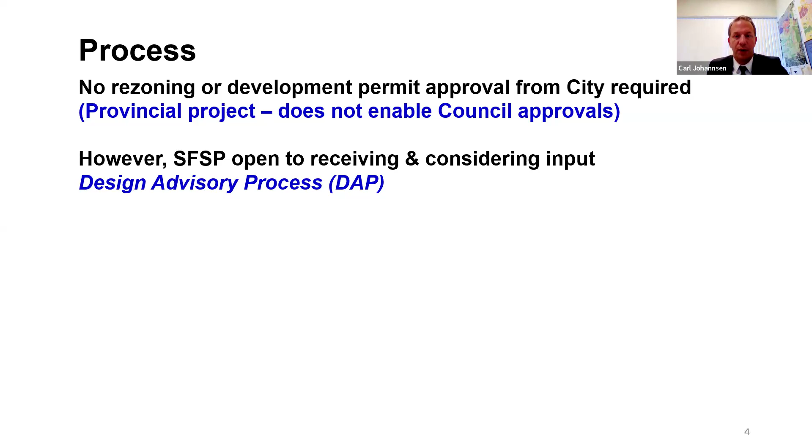So there's 3 rounds to the DAP process. In the first round they bring in their design, then they do a round of public engagement, open houses, which happened earlier this year.

And then it goes to municipal review where there's staff review and review by ADP. Once all those comments are collected by the design builder, it goes into a second round of updates, where they update the design where they see fit, and of course keeping cost control and the basic design of the project in mind.

Then they go through another round of public engagement, back to municipal review with an option to go to ADP, and then coming up with a final design that will move forward to construction, which would happen later next year. So at this point, we're at municipal review in round 1.

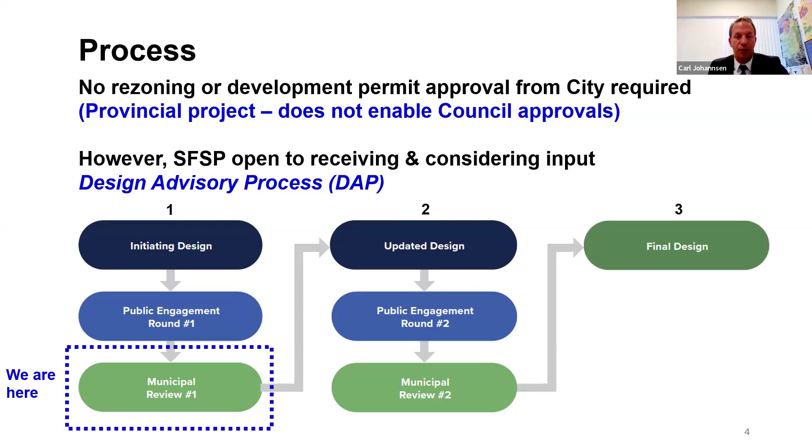So getting to the site is really important to get a good sense of where the SkyTrain station, the Langley City Centre station, is landing. With the context there, we know there's a lane and buildings to the south, but these are the back of house of these buildings, and the site is somewhat concealed behind buildings from the high exposure, high visibility intersection of Fraser Highway and 203 Street.

So when we talk about the transit user experience, knowing that transit users are pedestrians before they get on the train or bus and after they get off, the existing conditions on the site may inhibit or affect this experience. So it's important to have concerted planning and design to enhance this user experience, to make sure it's welcoming, inviting, and safe for transit users now and into the future. And what I mean by now is opening day in the latter half of 2029.

This site in the city, the sign on it might say the end of the SkyTrain extension, but we've always considered this as the gateway into the SkyTrain system. It's an opportunity for a landmark transit-oriented development to occur around the station, especially just south of it, where the station can be integrated into the Fraser Highway frontage and 203 Street intersection.

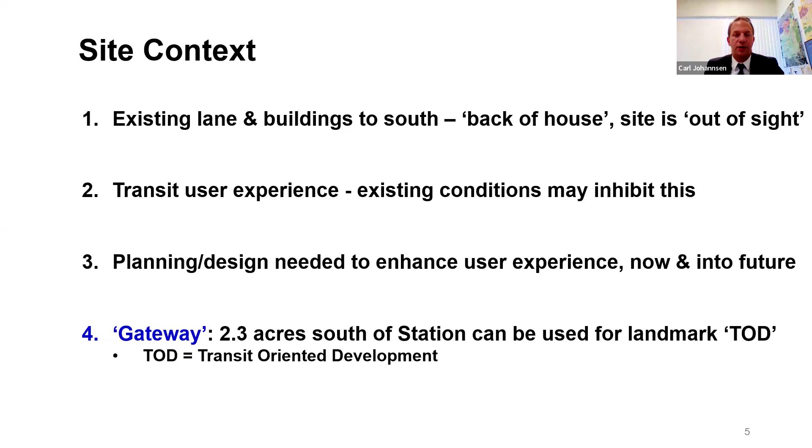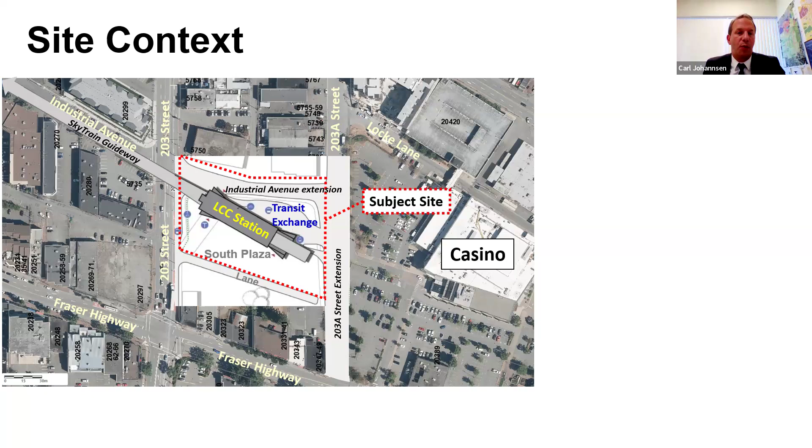So here's the site on the map, outlined in red, with the streets and the casino to the east for context. And here is the station landing on the site, also showing the extension of Industrial Avenue eastward to 203A Street, and the extension of 203A Street down to Fraser Highway to ensure there's a good grid system, which is also important for the operations of the transit exchange that will be located north of the station.

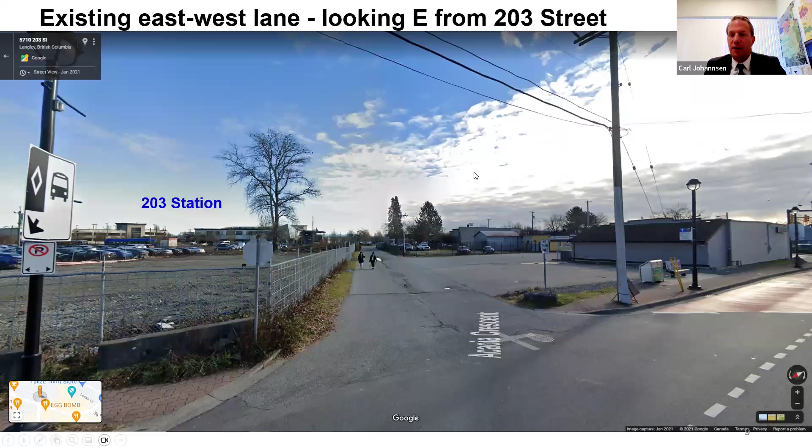The point of showing this is we know that SkyTrain is an elevated system, with elevated platforms, and all the transit users come out at the bottom of the station. You can see on the right-hand side all the glazing for the entrance. But stations typically also have a back of house, with offices and other elements hidden behind blank walls.

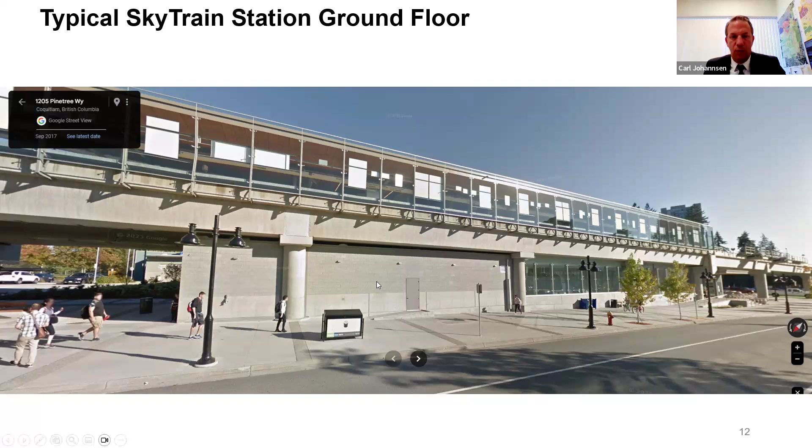So it's a bit of a design challenge, but also an opportunity when we think about the site here in Langley. It's something we really wanted to take advantage of when planning the site, knowing the SkyTrain station was going to land here in our downtown in that fashion, as I showed you on the previous map.

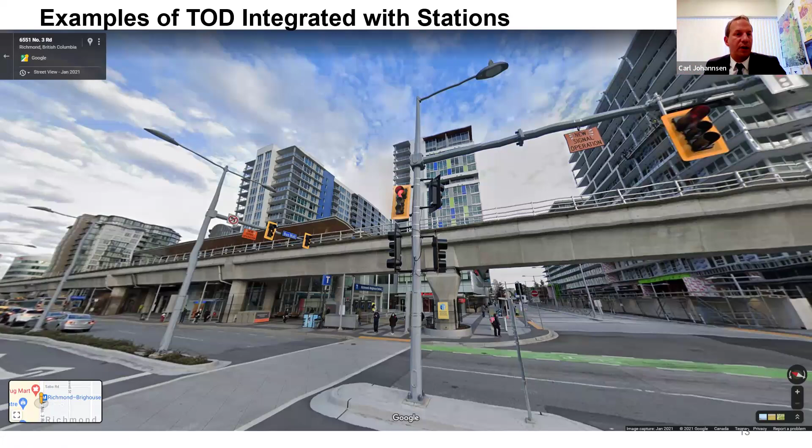So other cities have done a really good job integrating transit-oriented development right into the stations. This is in Richmond, and this is in Vancouver, where Cambie and Marine Drive meet up, showing the integration of new development directly with the station here.

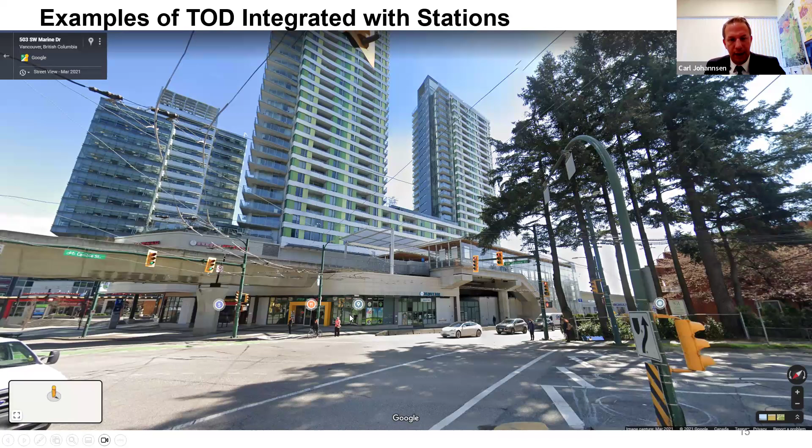Using the elevated station to the advantage of the development, but also tucking in retail and active pedestrian spaces underneath the guideway and beside it. That really helps to create a more active transit user experience, something like what you'd find on a downtown Main Street with a lot of shops, where people can walk by and you're not walking past a series of blank walls.

Mayor, did you want me to stop for questions now or wait till I finish my slide deck? You might as well go through it and then we can ask questions at the end. Okay, it should be just another 5 minutes here.

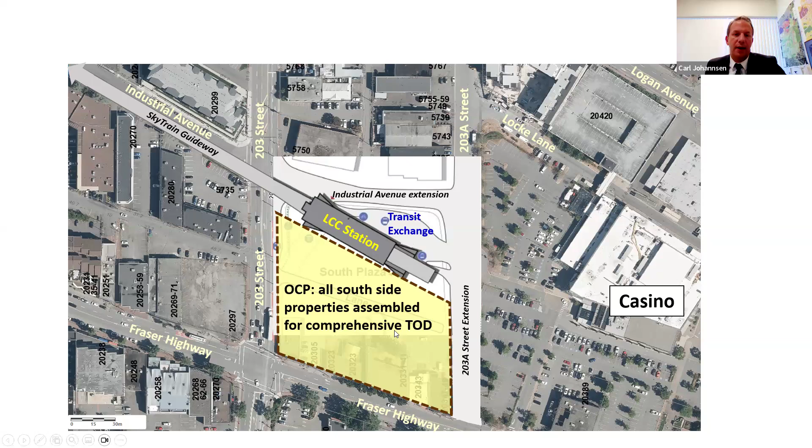In the OCP, knowing that the south part of the station structure would be a combination of entrances and blank walls, and knowing we want to connect the station to our high profile intersection at Fraser and 203, the official community plan calls for comprehensive redevelopment of the south side. The South Plaza identified in the ADP report and drawings is intended to be a temporary condition, but it's important to make sure it's well designed because it's probably going to be 5 to 10 years before that area is assembled and redeveloped consistent with the OCP.

Showing this from the report, this is one concept illustrating what's in the OCP in terms of bringing future buildings up to the side of the station, and also creating pedestrian plazas and connections from that high profile intersection through to the station entrance to create that direct connection. All of these pedestrian areas would be lined with retail, cafes and shops, with housing and offices above.

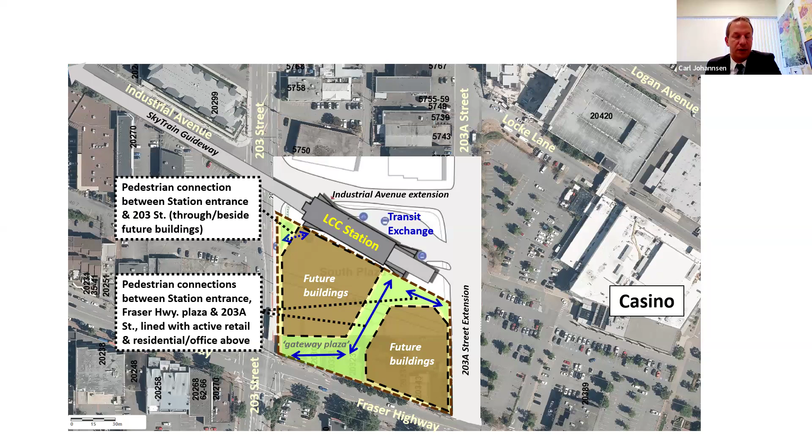That really helps to put eyes on the street and create a vibrant, active urban area that provides opportunities for transit users to get things when they're going to SkyTrain or coming off, and also helps connect the station into the urban environment and a growing downtown.

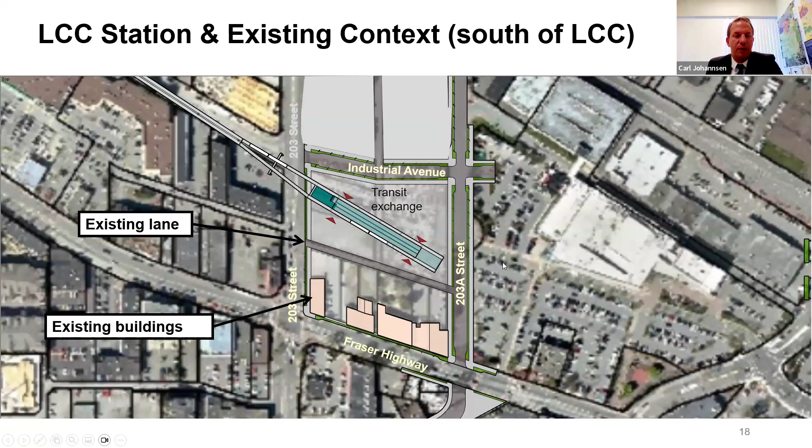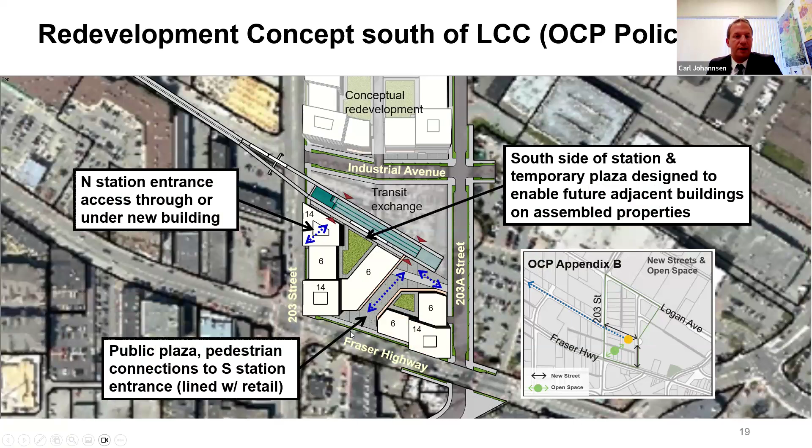As part of the process working with TIC, we did some three-dimensional modeling where we brought in the station, showing the existing buildings, and then showing how development could be directly adjacent to the station, where the entrance can actually go through part of the building. This is conceptual, it could be done a few different ways, but the key idea is creating that clear line of sight and pedestrian friendly connection between Fraser Highway and the main station entrance.

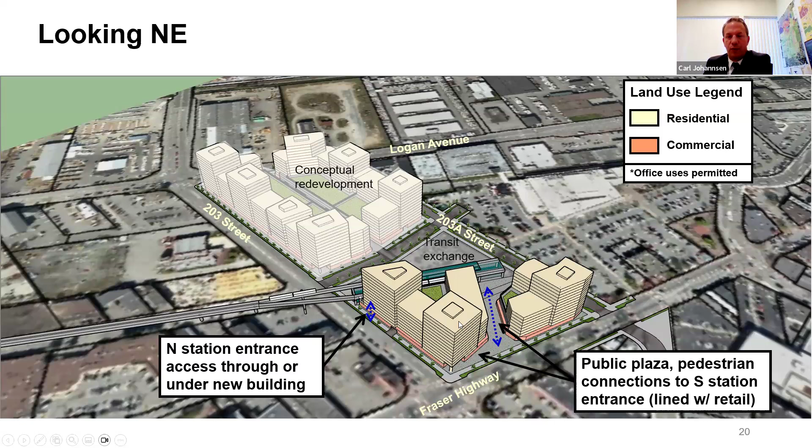Here's a perspective view of that, again showing the plaza with retail, offices and active uses on the ground floor, and housing and offices above.

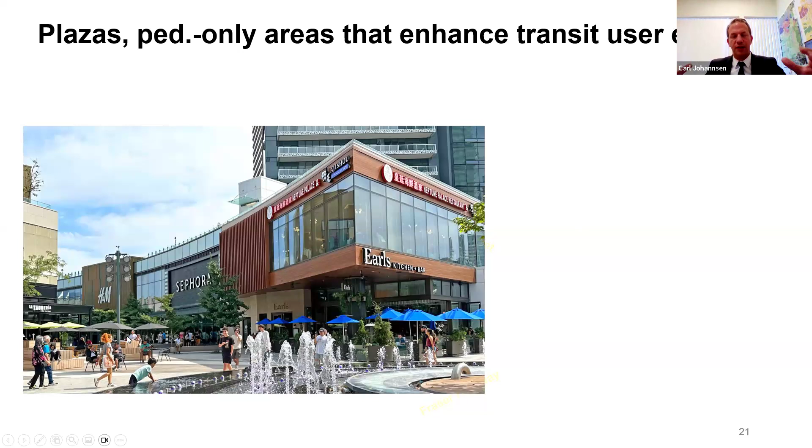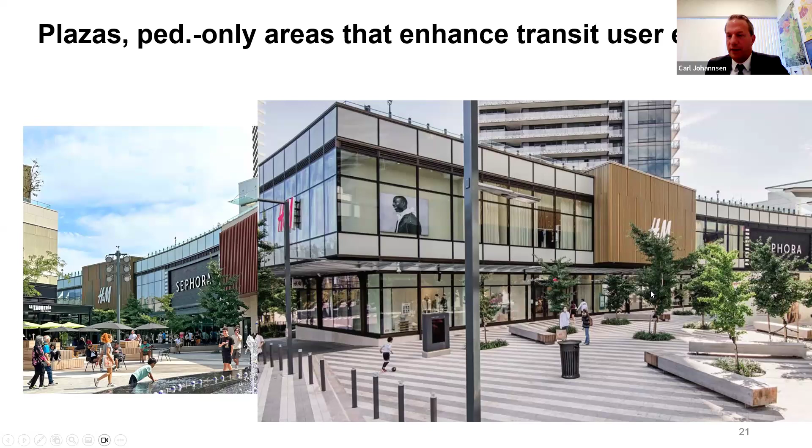To give you an idea of what this could look like using real world examples from Burnaby and Vancouver, the point is to show how the ground plane in the plazas could be treated with trees, paving, outdoor seating and patios, making sure there's development directly adjacent to where we have a high volume of transit users going to and fro. This example shows clear glazing along ground floors to provide visibility and engagement with buildings, lots of trees, and signature paving treatment.

These previous examples are from Brentwood Mall. This is Marine Gateway, showing a really enhanced plaza area with ground floor retail and housing above. You can imagine that in our case, the station entrance could be at the end here.

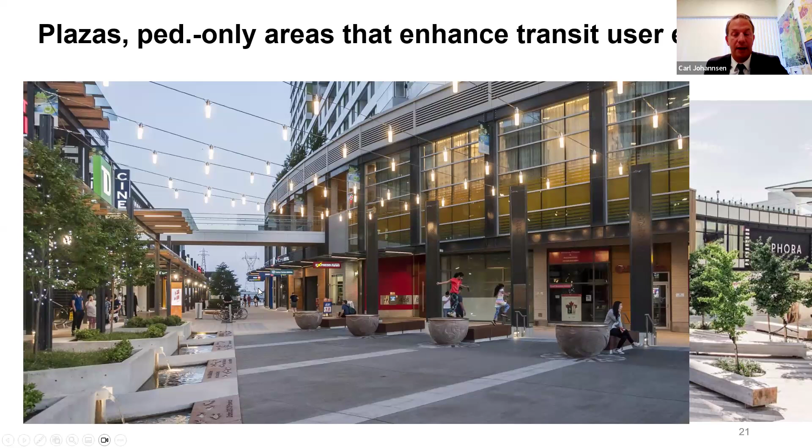Here's another view of that, again showing the scale. It can be scaled to something conducive to what we have here in the city with our height limit up to 14 stories.

With that, we provided all that input to TIC, and when they brought in their contractor, South Fraser, the design build contractor, they took that into consideration, but also brought their own design based on the reference concept design created over the past few years.

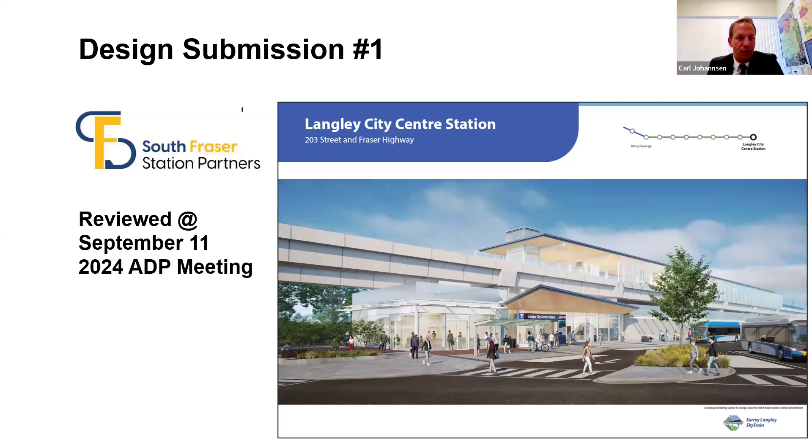This was presented at the ADP meeting, and you can see this is a view looking at the transit exchange side of the station. The architect really wanted to emphasize an open platform with a lot of West Coast theming with wood materials, a lot of glazing here with a retail unit and the entrance here, and then the transit waiting area.

Further to the north, using screening and plaza areas to really enhance the transit user experience and make sure there's a lot of eyes on the plazas and the transit exchange.

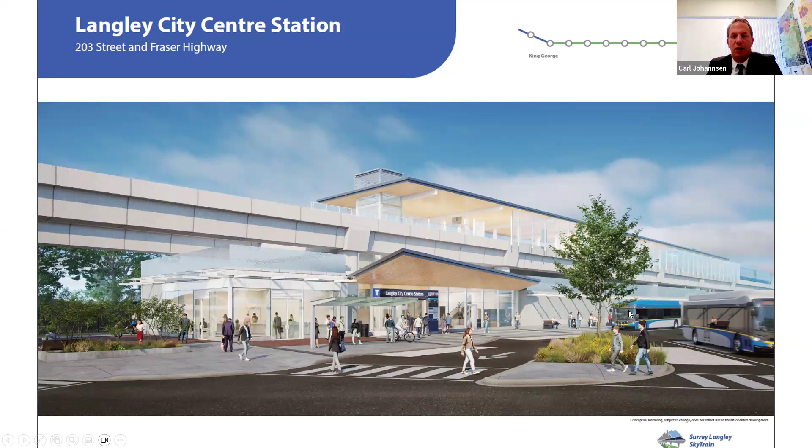This is a view of the exchange, and the exchange also includes the bus parking or pickup and drop off areas, which are up against the station here where my cursor is.

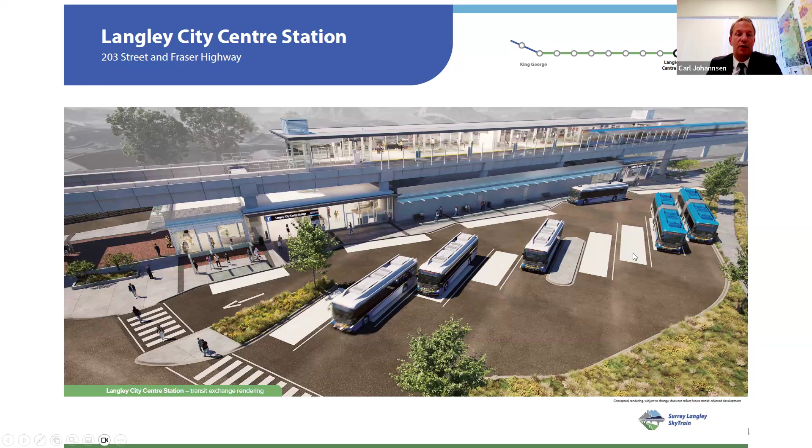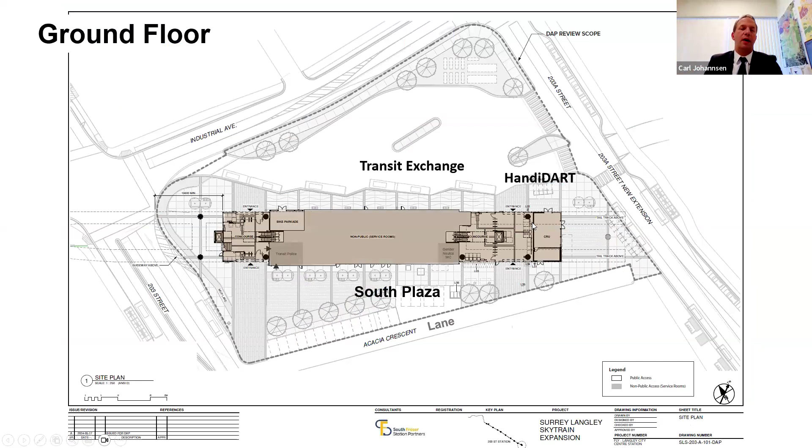This area here is a bus layover area, which is being designed to facilitate future electric bus charging. This shows the ground floor plan. I want to show some of the highlights being brought forward as part of the design. This shaded area is the actual footprint of the station at the ground floor as it sits on the site.

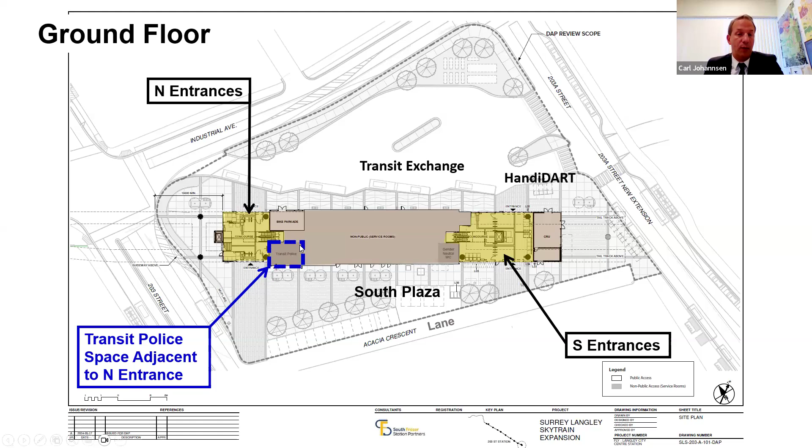Here are the entrances on the north side and the south. I say entrances because you can actually walk right through from the south to the north and from the north to the south. Here is the transit police space, which will be directly adjacent to the north entrance. That's a pretty key aspect of this design, and something the city has requested from day one, to have a transit police presence at the station.

The bike parkade is located adjacent to the transit exchange for ease of use. There's going to be a gender neutral washroom put in the station behind the fare gates. And like I said before, there's a retail unit that's going to be featured at the end to provide some services on site and some immediate transit user convenience and vibrancy on the site prior to development happening on the South Plaza and in the area around it.

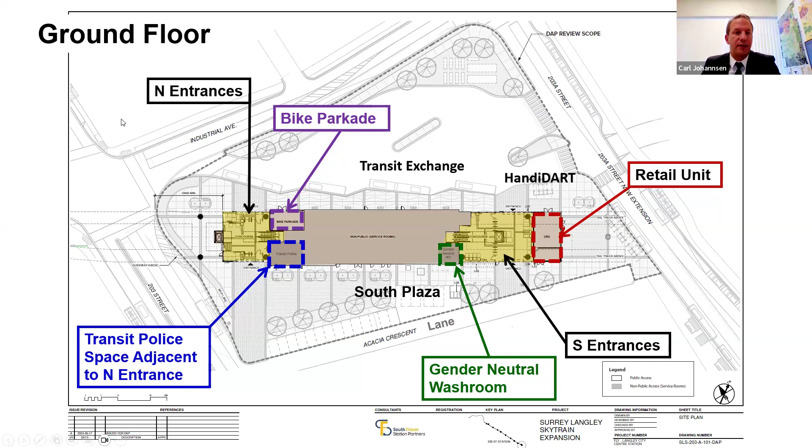Here's a landscape plan just showing the details with the paving materials. The station architect has done a great job putting in a number of really interesting paver materials and cast-in-place concrete pavement, saw cut, so it's nice and smooth for people using wheelchairs and scooters and rolling.

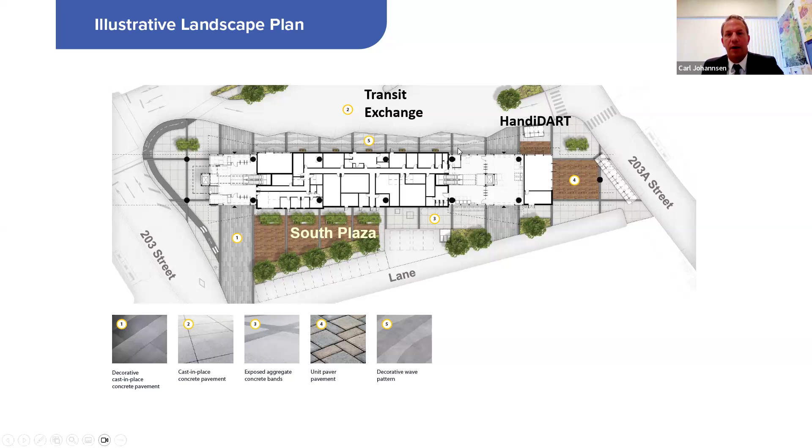Also using the exposed aggregate concrete band patterning that you see on the Evergreen Line stations in Coquitlam and Port Moody, and also bringing forward on the north side here a decorative wave pattern, which is actually being extended from the public realm that's going to be put in underneath the SkyTrain guideway on Industrial. So it helps to add some immediate character and sense of place to the landscape design.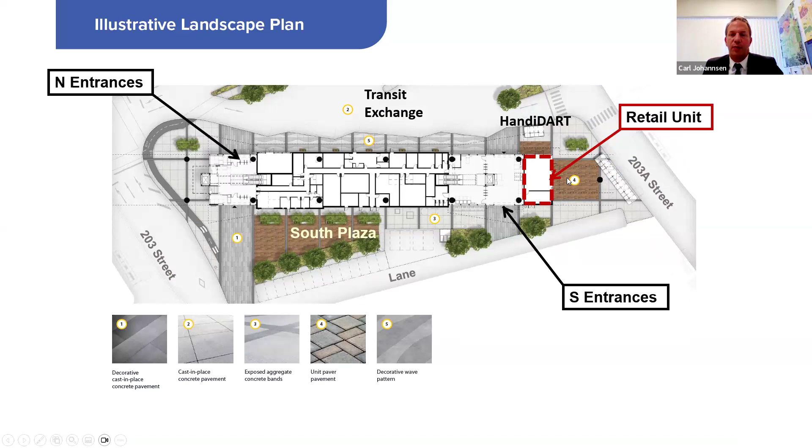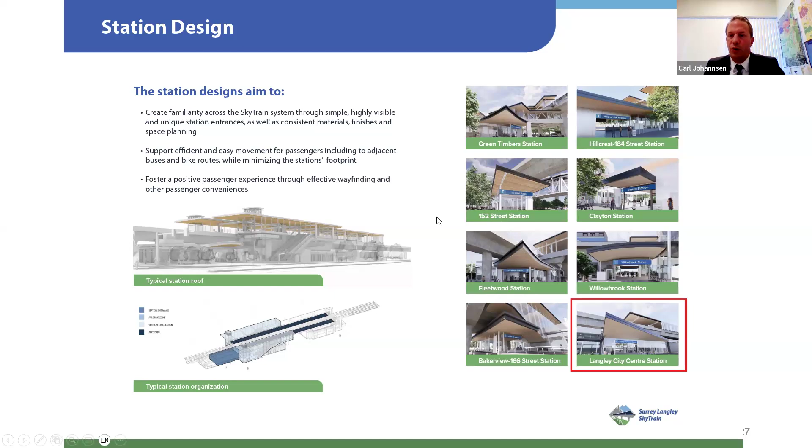Again, here are the entrances and the retail unit, with attention being paid to creating a unique paving pattern for the plaza area by the retail unit and on the south side. Here's a couple of slides from the design package, again just showing how this station relates to the other ones in terms of the use of wood and the open design, and also showing some detail in terms of the materials being used for the station.

There's a difference between the station I showed earlier at Lafarge Lake and what they're using here. Instead of using the masonry block for the back of house, they're going to be using textured concrete paneling that can be put in a series of patterns and that sort of thing to provide additional visual interest.

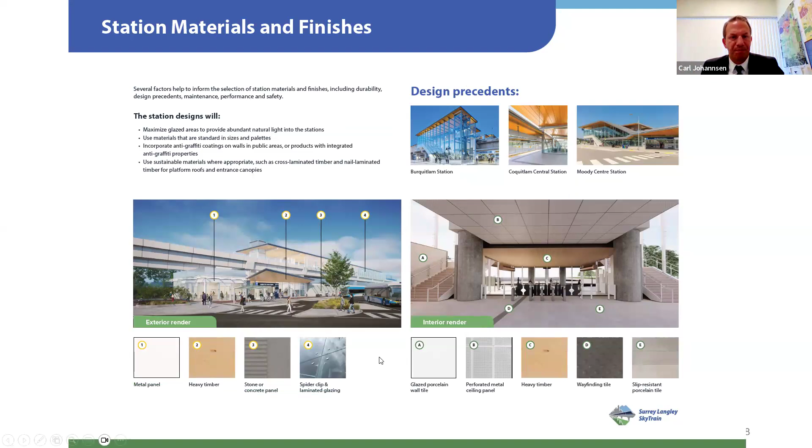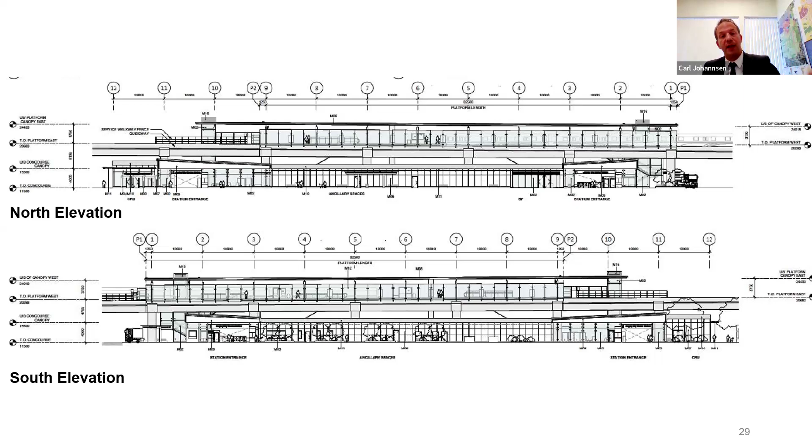Okay, close to the end here, here's a couple of elevations on the top showing the view of the station from the north, and then the bottom is the view of the station from the South Plaza. So imagine if you're on that lane and you're looking at it.

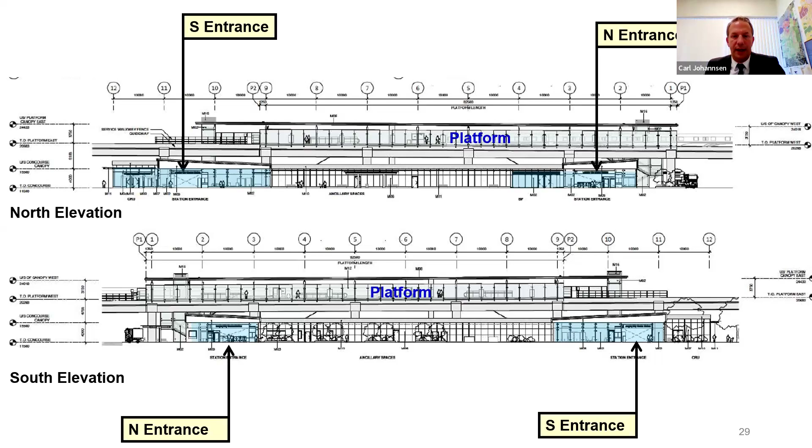Here are the platforms on the second level and the entrances, and I've shaded in the glazed areas, or the clear window areas, in light blue on the ground floor, so you can see what is glazed and what is not. On the north side, you can also see where the bike parkade is going to be beside the entrance with glazed windows, so you can see in and out of the parkade for safety reasons. And on the south side, you can see the retail unit.

One of the comments that came out of ADP and from staff is that we'd like to see some glazing on the south side of the retail unit to make sure that people can see in and out of that unit onto the plaza when the station is open.

These light brown areas just show, again, those back of house areas of the station where there's offices and transit police and everything inside that are only accessible to the police and transit staff. And this is where their concrete paneling treatment is being put in.

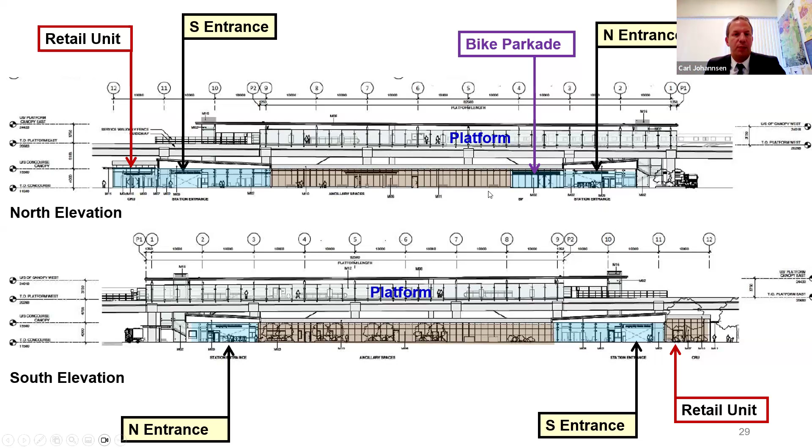On the north elevation, that's where a lot of the transit waiting area is going to be, and on the south is a series of doors and small windows. That's going to be that station wall facing the plaza, which provides an opportunity for development to come up against it in the future, again to provide an opportunity to have a building almost grow out of the station, again with those active ground floors.

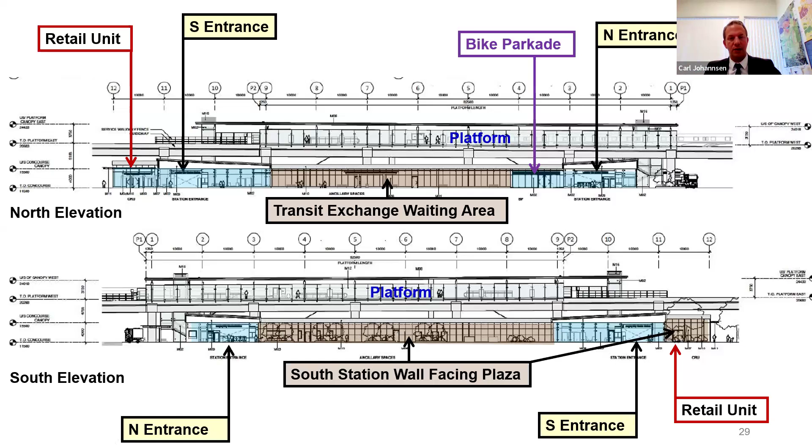Looking at the exit stair design on the north side of the station, there were a little bit of concerns. There might be some areas there that may create blind corners. So there are some suggestions there.

The tail track, the end of the actual guideway, goes a little bit further east, almost up to the sidewalk on 203A Street. So there's a lot of interest to see if the station partners, design builder, could do something interesting there with the tail tracks, potentially with public art.

Automatic doors in the bike parkade, pedestrian crosswalk at the bus exchange. This one was emphasized quite a bit: adding more shade trees into the landscape plans, especially on the south side. Enhance the appearance of the propulsion power station, which is located up on Industrial Avenue.

And of course, we can talk about that. I have a few slides if you want to talk about that, but in the interest of time, I've left those out. There was an emphasis on making sure those concrete panels on the transit exchange side are resistant to vandalism, they're durable.

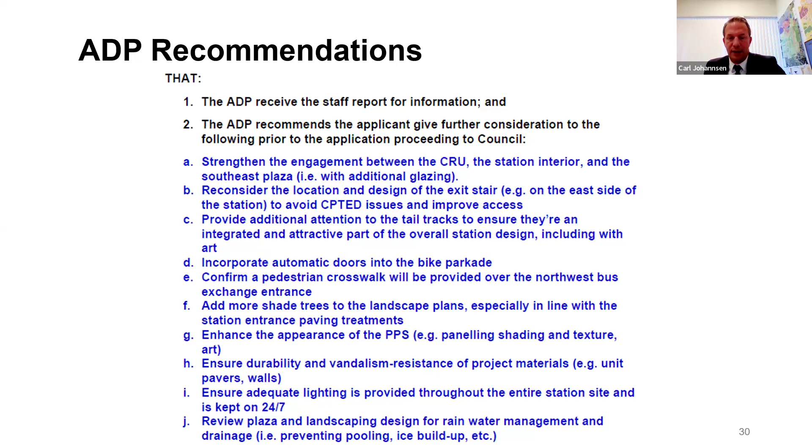And very important to ensure there's lighting throughout the site, and it's on 24/7, which it definitely will be, but it's important to emphasize that. And also reviewing the plaza landscaping design for usability and drainage.

So next steps coming out of council today: we're going to put everything together and send it to the station contractor and TIC by October 4th. That is our deadline. They're going to consider the input and they may incorporate it into the second design submission and then present this at a second round of public open houses.

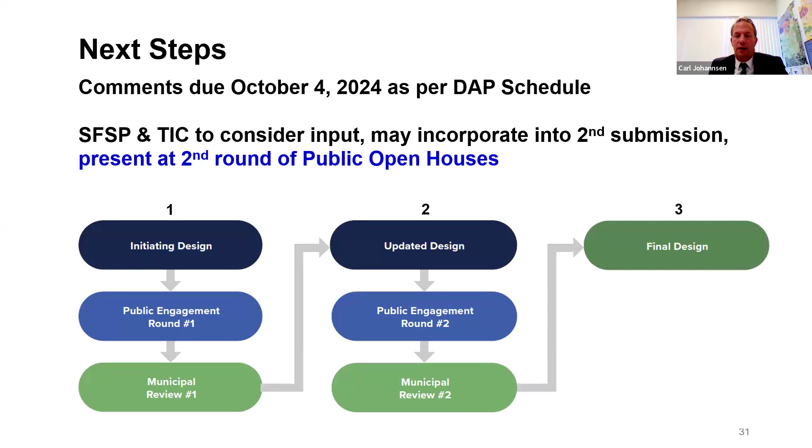As talked about before, we're at the end of the first round and we would be going into the second round now in the interest of getting to a final design and getting under construction. So that's what I have, Mayor, and thanks for the opportunity to present and open to comments.

Thank you very much. So we'll see if some folks have any questions on this. We will go with Councillor Wallace and then we'll go to Councillor Solyom.

Thank you for the presentation. I'm sorry, I'm trying to figure out the hand thing and it's not working. I'm pressing. It's in reactions. I am pressing the hand and it's not allowing me. So I'm just, thank you for recognizing that my hand is up.

Just a few questions in regards to the design concept. I love the decorative wave pattern and the way that it is. I feel it mimics the Nicomekl floodplain. I think that's really important, and I hope that carries through to the Innovation Boulevard.

Maybe when we get our Performing Arts and Cultural Centre, that same mimicking happens. And then I was mentioning to Nathan in regards to Indigenous public art and connecting that wave with the story of the salmon and the Nicomekl River.

I think that would be really important. And also the glazing, and looking at public art, some strategic things to do with glazing and adding even the mimicking of waving and the salmon. I think it's a really important story and Indigenous feature, that historical reference and the story of how important salmon are.